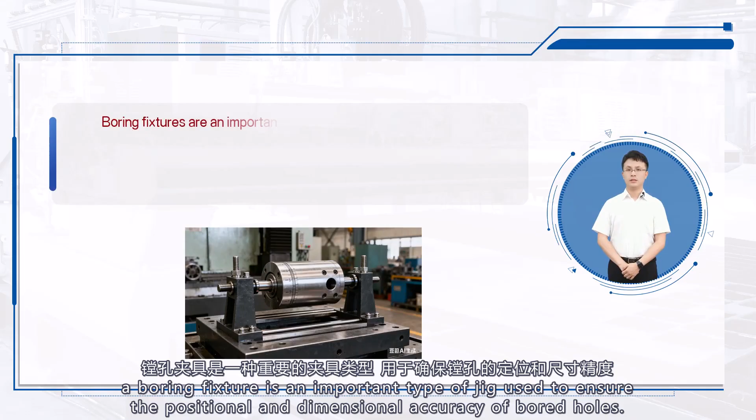and application scenarios. In machine tool processing, a boring fixture is an important type of jig used to ensure the positional and dimensional accuracy of bored holes. As a type of boring fixture, the single support boring fixture has unique structural characteristics and applications.

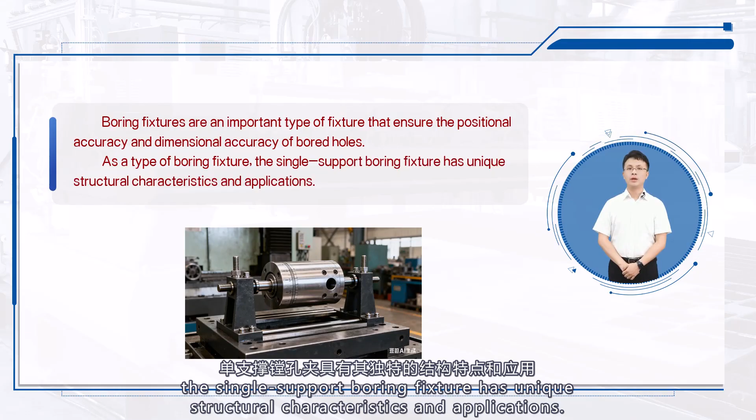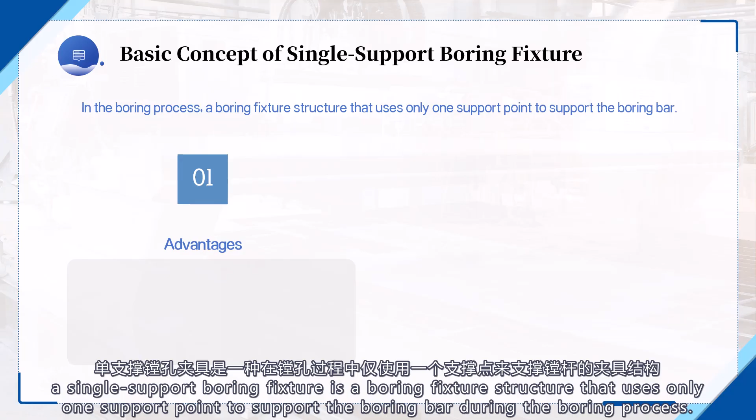Basic concept of single support boring fixture. Simply put, a single support boring fixture is a boring fixture structure that uses only one support point to support the boring bar during the boring process. Compared to multi-support boring fixtures, this structure has advantages such as relatively simple structure and lower cost, but it also has certain limitations in some aspects.

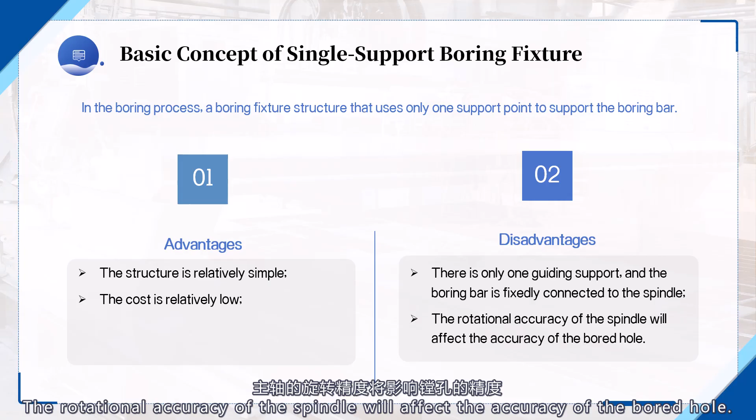Since there is only one guiding support, the boring bar is fixedly connected to the spindle. The rotational accuracy of the spindle will affect the accuracy of the bored hole.

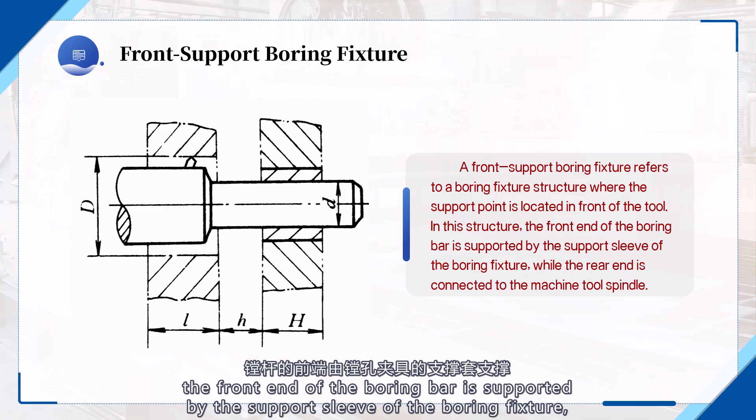Classification of structural forms of single support boring fixture. Front support boring fixture. A front support boring fixture refers to a boring fixture structure where the support point is located in front of the tool. In this structure, the front end of the boring bar is supported by the support sleeve of the boring fixture, while the rear end is connected to the machine tool spindle.

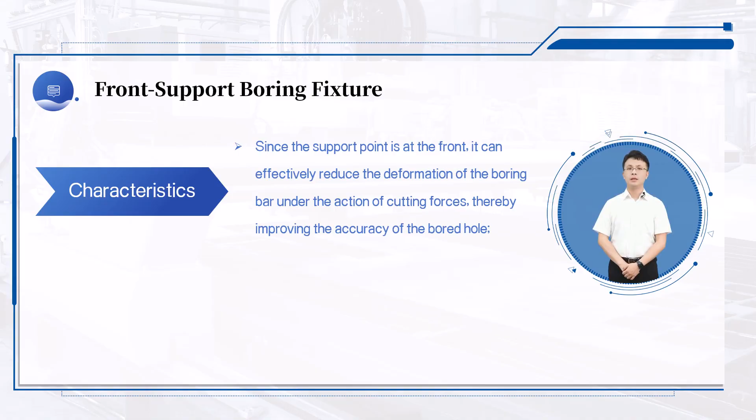Characteristics. Since the support point is at the front, it can effectively reduce the deformation of the boring bar under cutting forces, thereby improving the accuracy of the bored hole. Additionally, this structure facilitates observation and measurement of the machining process, making operation relatively convenient.

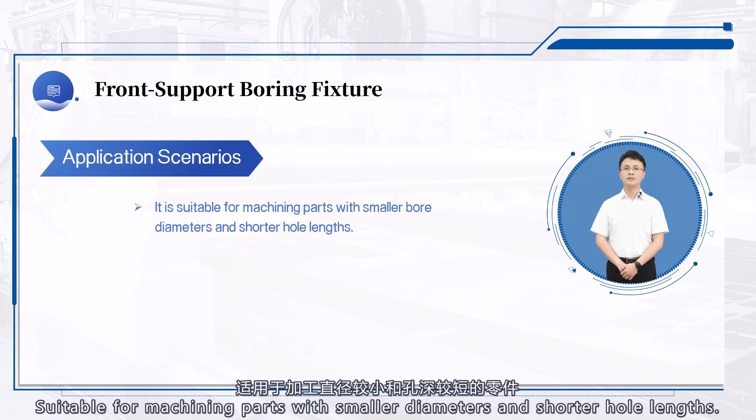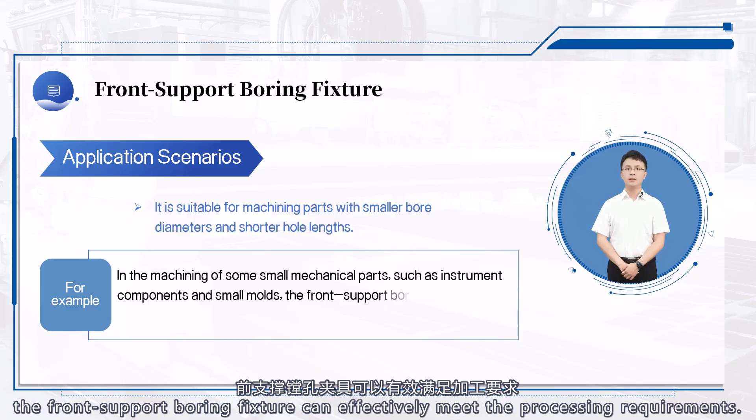Application scenarios. Suitable for machining parts with smaller diameters and shorter hole lengths. For example, in the machining of small mechanical parts, such as instrument components and small molds, the front support boring fixture can effectively meet the processing requirements.

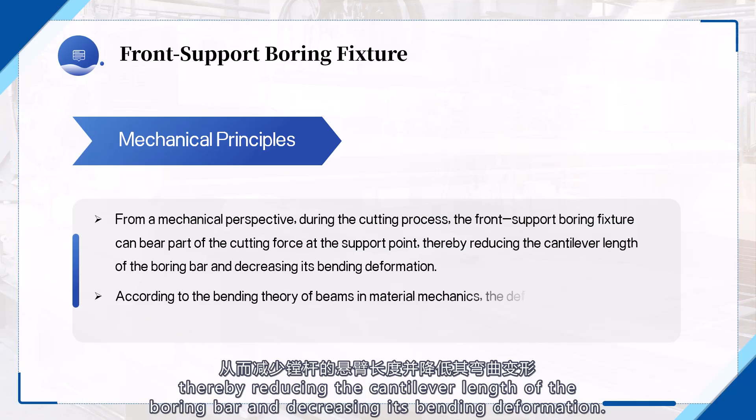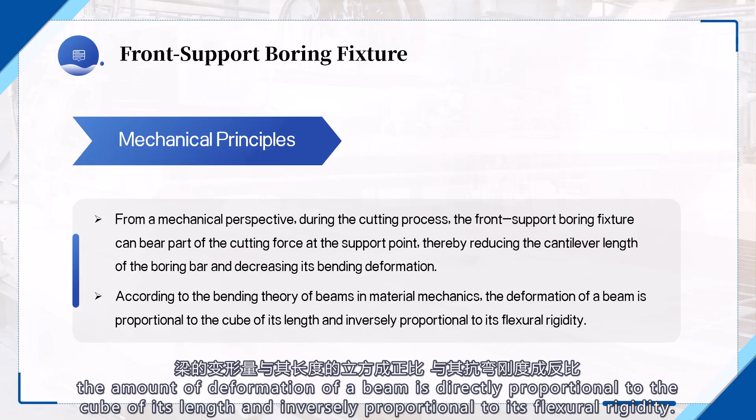Mechanical principles. From a mechanical perspective, in the cutting process, the support point of the front support boring fixture can bear part of the cutting force, thereby reducing the cantilever length of the boring bar and decreasing its bending deformation. According to the bending theory of beams in material mechanics, the amount of deformation of a beam is directly proportional to the cube of its length and inversely proportional to its flexural rigidity.

Let the length of the boring bar be L and its flexural rigidity be EI. Under the cutting force F, the maximum deformation delta of the boring bar can be approximately expressed as delta equals F times the cube of L divided by 3 times E times I.

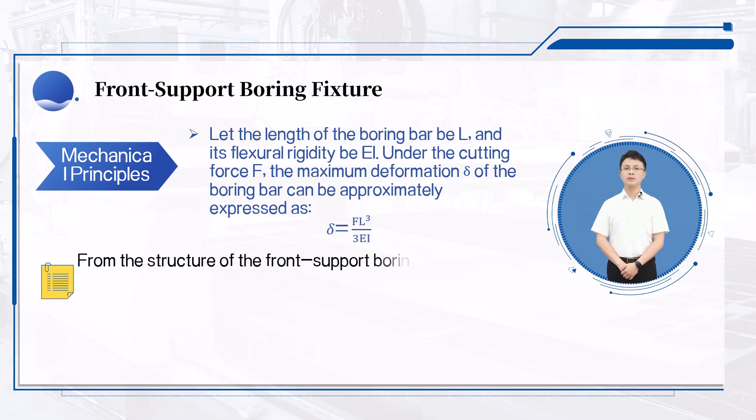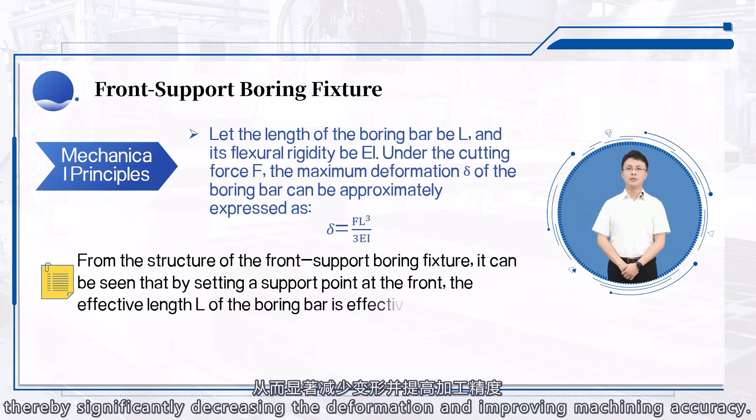From the structure of the front support boring fixture, it can be seen that by setting a support point at the front, the effective length of the boring bar is effectively reduced, thereby significantly decreasing the deformation and improving machining accuracy.

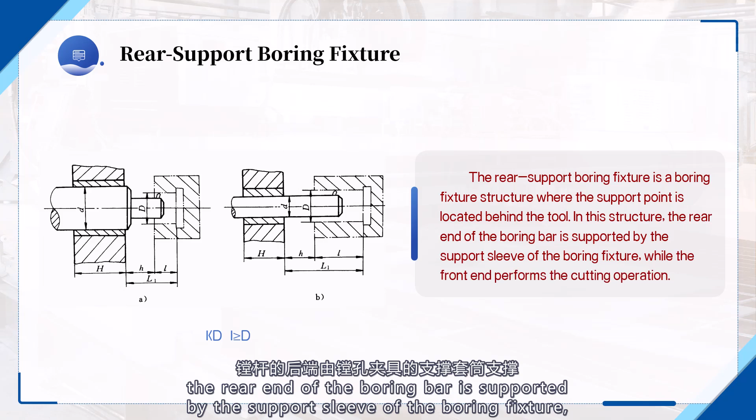Rear support boring fixture. A rear support boring fixture is a boring fixture structure where the support point is located behind the tool. In this structure, the rear end of the boring bar is supported by the support sleeve of the boring fixture, while the front end performs the cutting operation.

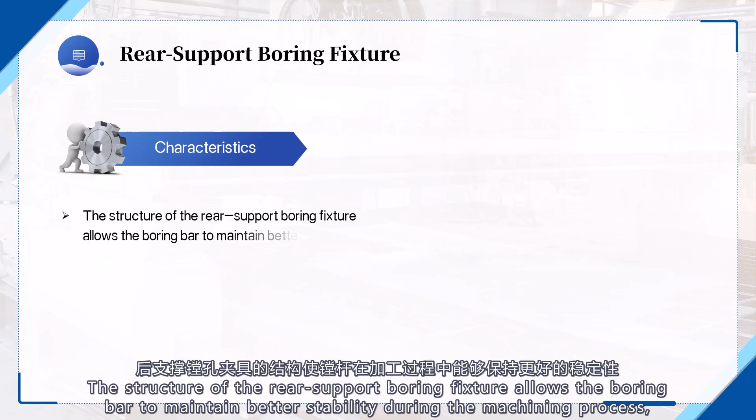Characteristics. The structure of the rear support boring fixture allows the boring bar to maintain better stability during the machining process, reducing the impact of vibrations. Additionally, since the support point is at the rear, it does not interfere with the installation and adjustment of the tool.

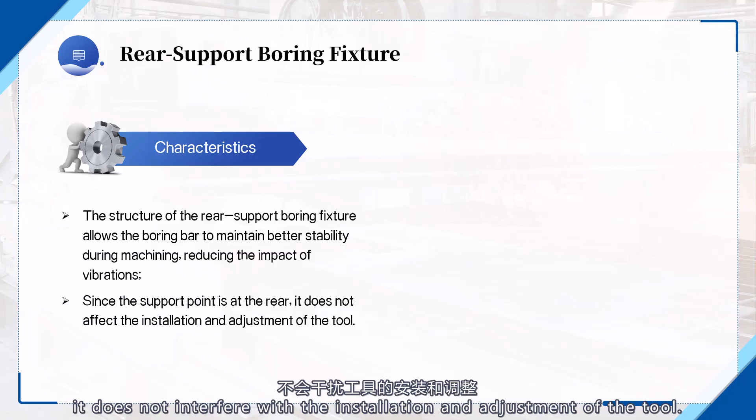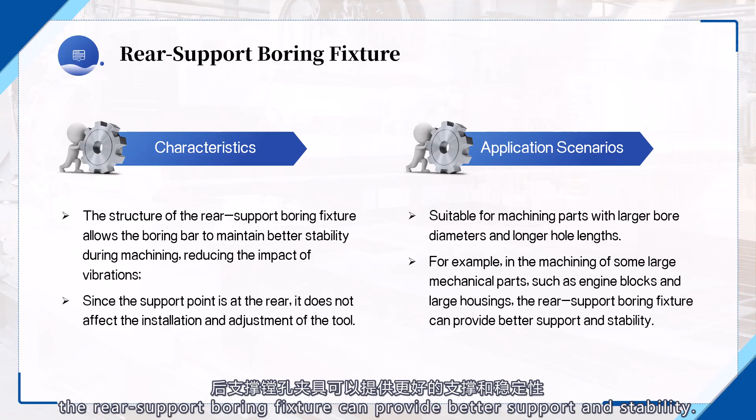Application scenarios. Suitable for machining parts with larger diameters and longer hole lengths. For example, in the machining of large mechanical parts, such as engine blocks and large housings, the rear support boring fixture can provide better support and stability.

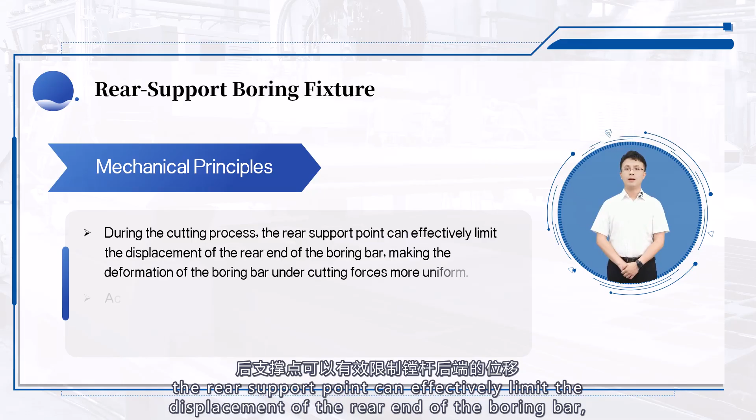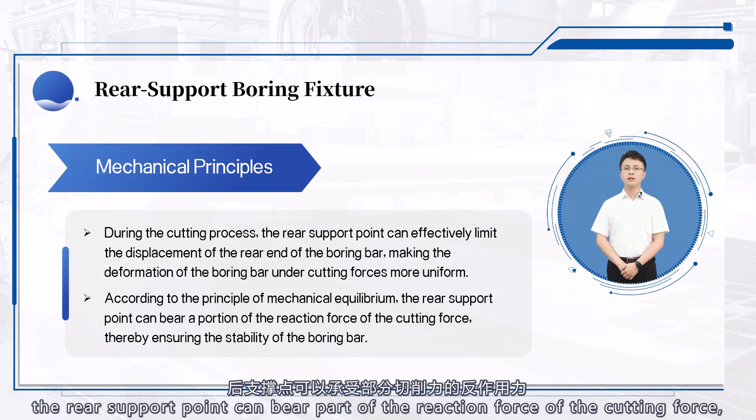Mechanical principles. During the cutting process, the rear support point can effectively limit the displacement of the rear end of the boring bar, making the deformation of the boring bar under cutting forces more uniform. According to the principle of mechanical equilibrium, the rear support point can bear part of the reaction force of the cutting force, thereby ensuring the stability of the boring bar.

Let the cutting force be F and the reaction force at the rear support point be R.

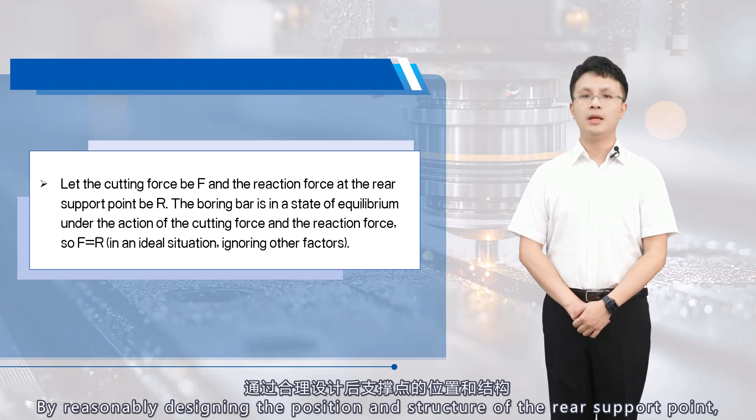The boring bar is in a state of equilibrium under the action of the cutting force and the reaction force. Thus, F equals R in an ideal situation, ignoring other influencing factors. By reasonably designing the position and structure of the rear support point, the force distribution on the boring bar can be optimized, thereby improving machining quality.

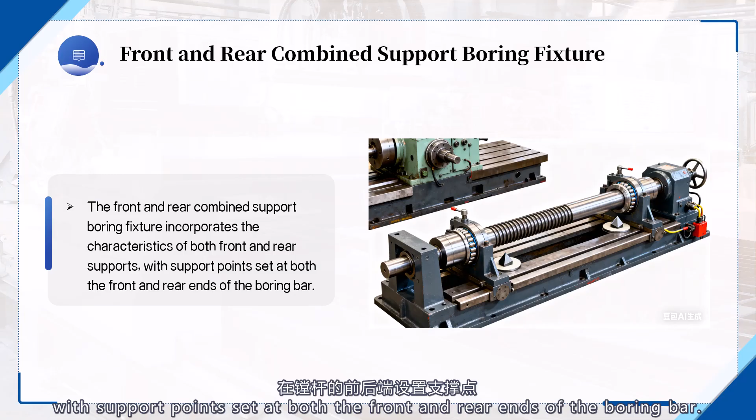Combined front and rear support boring fixture. A combined front and rear support boring fixture incorporates the characteristics of both front and rear supports, with support points set at both the front and the rear ends of the boring bar.

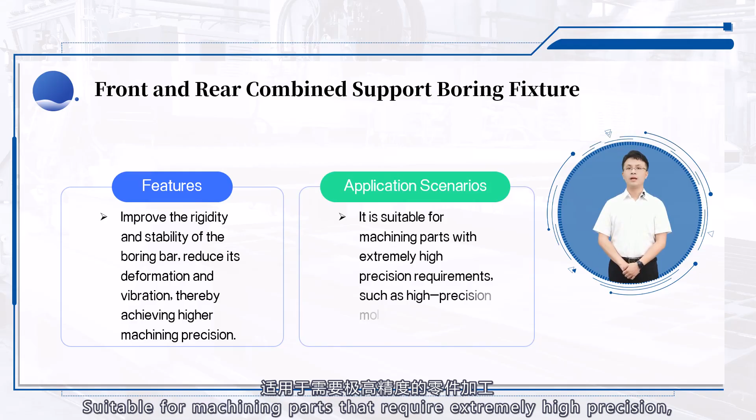Characteristics: this structural form can maximize the rigidity and stability of the boring bar, reducing its deformation and vibration, thereby achieving higher machining accuracy. Application scenarios: suitable for machining parts that require extremely high precision, such as high-precision molds and aerospace components.

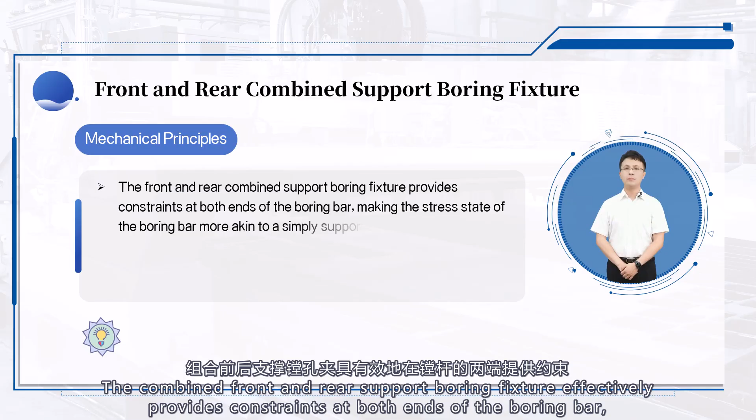Mechanical principles. The combined front and rear support boring fixture effectively provides constraints at both ends of the boring bar, making its force-bearing state more akin to that of a simply supported beam. According to the bending theory of simply supported beams, under the same cutting force, the deformation of a simply supported beam is much smaller than that of a cantilever beam.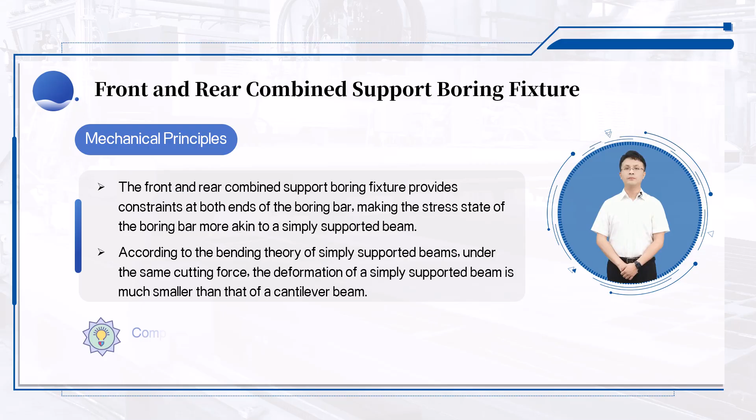Compared to a cantilever beam, the combined front and rear support boring fixture can significantly enhance the rigidity of the boring bar and improve machining accuracy.

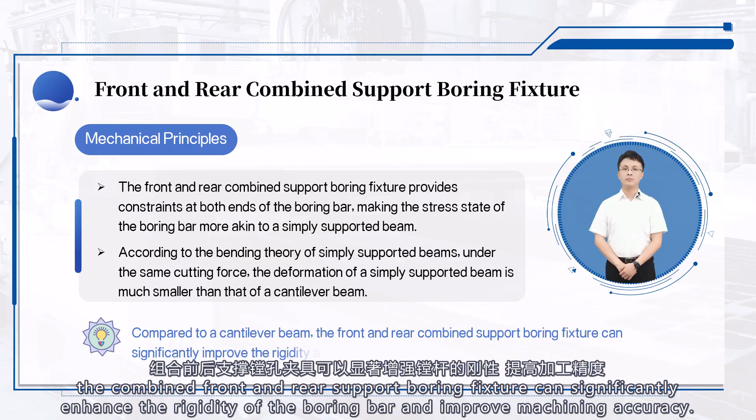Key design points for single support boring fixture. When designing a single support boring fixture, the following key aspects need to be considered. Selection of support sleeve: the precision and the material of the support sleeve directly affect the support effectiveness of the boring bar. Generally, the support sleeve should have high precision and wear resistance, with common materials being bronze, cast iron, etc.

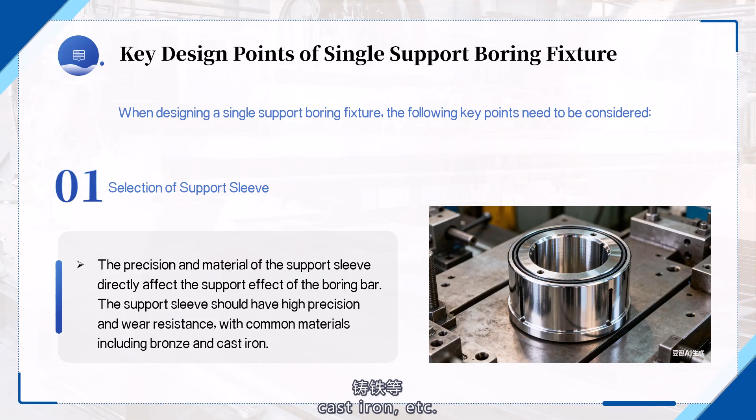Determination of support point position. The position of the support point should be reasonably determined based on the machining requirements of the part and the force conditions of the boring bar. While ensuring machining accuracy, the cantilever length of the boring bar should be minimized as much as possible.

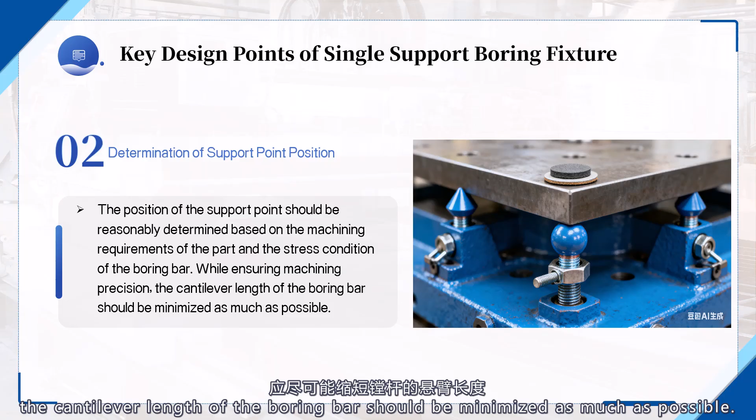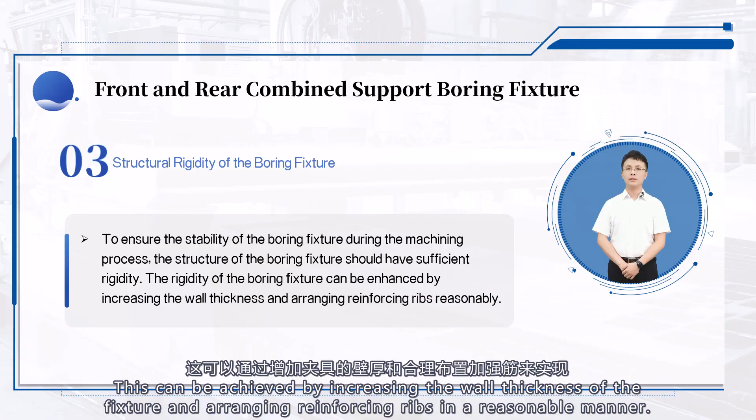Structural rigidity of the boring fixture. To ensure the stability of the boring fixture during the machining process, the structure of the boring fixture should have sufficient rigidity. This can be achieved by increasing the wall thickness of the fixture and arranging reinforcing ribs in a reasonable manner.

Ideological and political elements: the mechanical wisdom in the single support design of heavy machine tools as a metaphor for an independent development path. The single support design of heavy machine tools embodies rich mechanical wisdom. Designers skillfully apply mechanical principles to reasonably design the support structure, enabling the machine tools to maintain machining accuracy while reducing costs and improving efficiency. This deep understanding and application of mechanical principles reflect China's independent innovation capabilities in the field of mechanical manufacturing.

From an ideological and political perspective, the success of the single support design in heavy machine tools metaphorically represents China's spirit of independence and self-reliance in its industrial development path. In the face of foreign technological blockades and competitive pressures, Chinese researchers and engineers have relied on their own intelligence and efforts to overcome numerous technical challenges, achieving independent research, development, and the production of high-end equipment such as heavy machine tools.

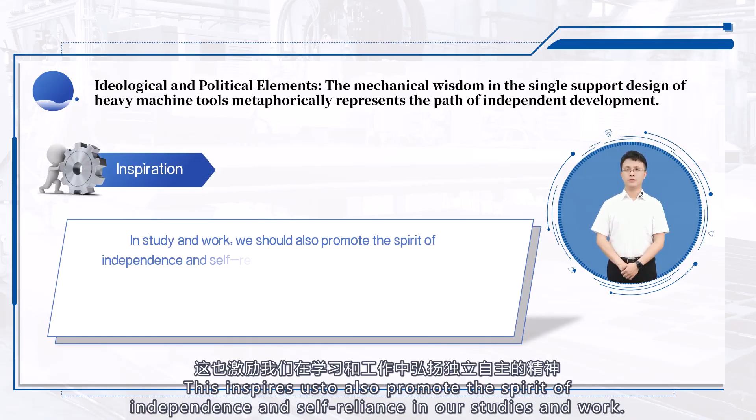This inspires us to also promote the spirit of independence and self-reliance in our studies and work. We should be brave in exploration and innovation, relying on our own abilities to solve problems and contribute to the development of the country and the rejuvenation of the nation.

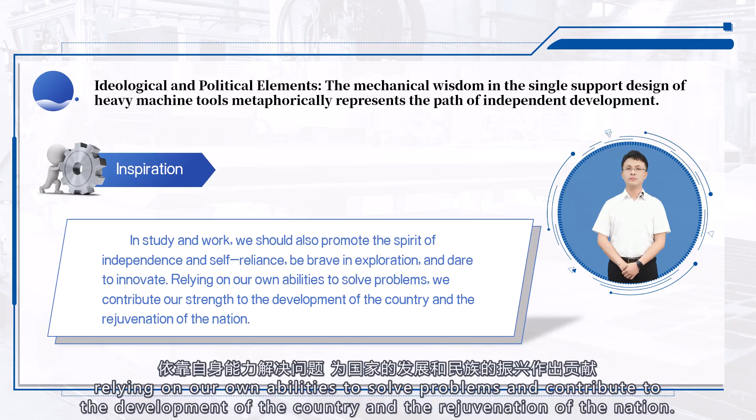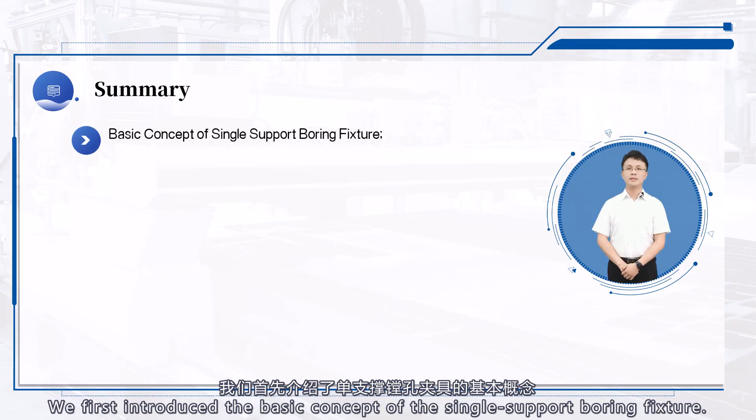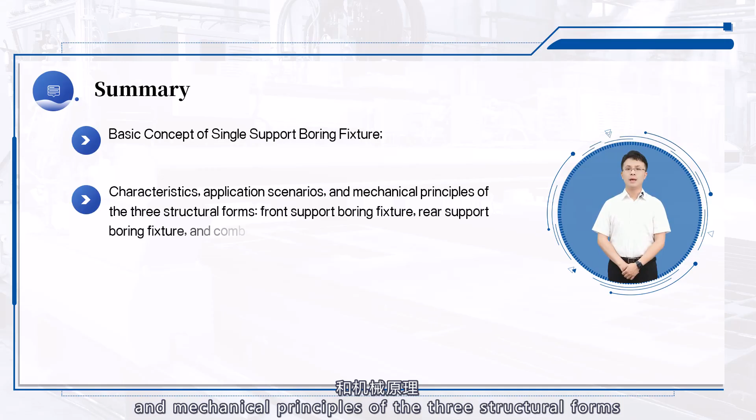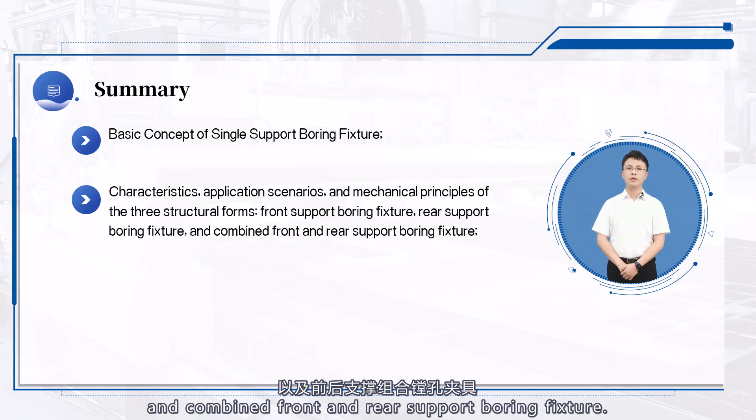In this lesson, we primarily discussed task point 5.2.1, which focuses on the structural form of the single support boring fixture in Project 5. We first introduced the basic concept of the single support boring fixture. Then, we provided a detailed explanation of the characteristics, application scenarios, and mechanical principles of the three structural forms: front support boring fixture, rear support boring fixture, and a combined front and rear support boring fixture.

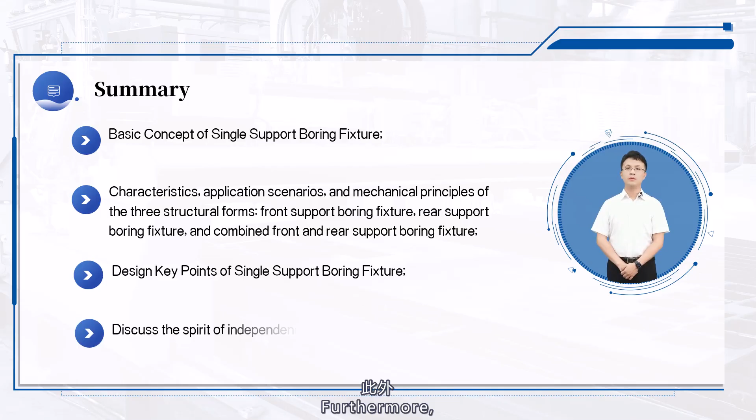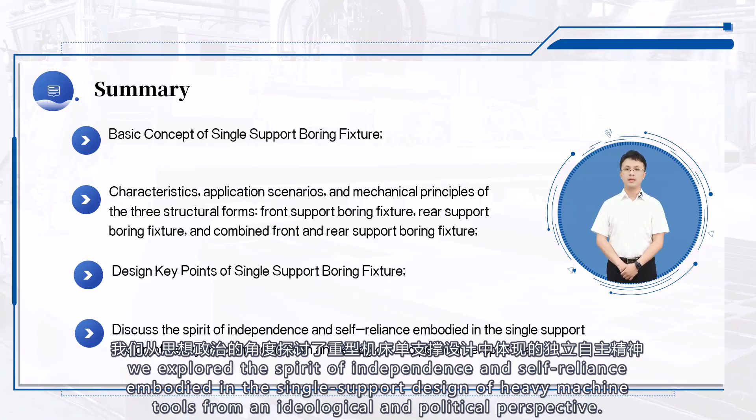Additionally, we mentioned the key design points for the single support boring fixture. Furthermore, we explored the spirit of independence and self-reliance embodied in the single support design of heavy machine tools from an ideological and political perspective. I hope that through this lesson, everyone has gained a deeper understanding of the structural forms of single support boring fixtures and can apply the knowledge learned to actual machine tool processing.